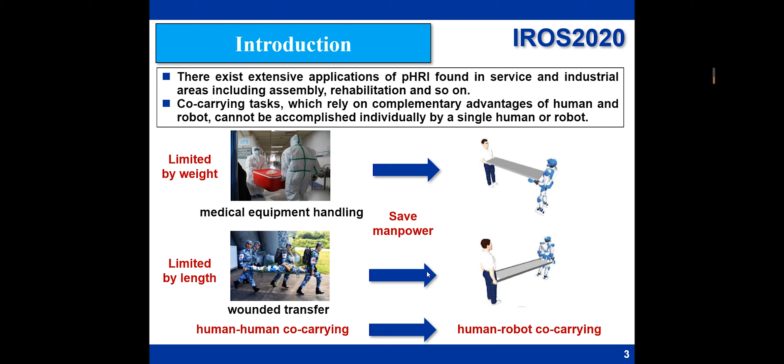Human-human co-carrying shows better task adaptability compared with robot-robot co-carrying when the environment changes suddenly or the task object changes. And robot co-carrying can save human effort compared with human co-carrying.

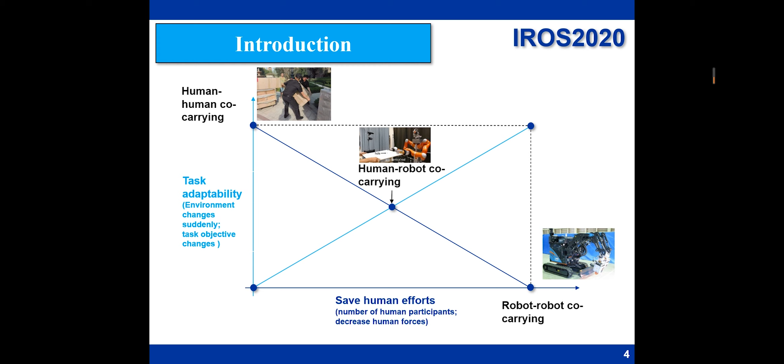Human-robot co-carrying combines the perception and decision-making ability of humans with the load and movement ability of robots. It can be used in unstructured environments and decrease the number of human participants and human forces required.

In human-robot interaction, to ensure the task is finished successfully, the robot should perceive a precise object location and know the prior task process. But more than that, the movement of the robot should be completely compliant to the motion of the human.

This means the robot needs to know the motion intention of the human and adapt to the movement and interaction force of the human. There are two collaborative modes.

One utilizes only force sensing. The human leads the task and the robot is blind to the task, following the human passively. This will generate delays or counteraction.

Another method utilizes force and visual sensing. The robot has visual ability and follows the human actively, so motion synchronization can be achieved.

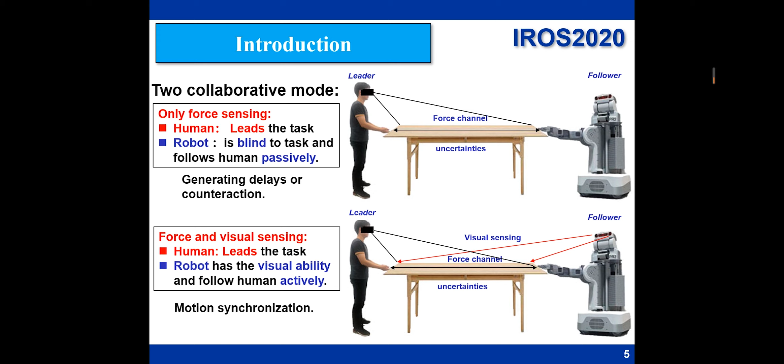In our work, the focus of interest is using vision and force sensing together to enable human and robot to collaboratively perform a co-carrying task.

The coupled relationship between robot, transported object, and human brings difficulties in analyzing the behaviors of both human and robot. The robot should have the following abilities.

The first is visual sensing, to measure human motion and estimate human motion intention to achieve motion synchronization. The second is force sensing, which can measure the external force on the robot gripper and regulate interaction force to achieve safe interaction.

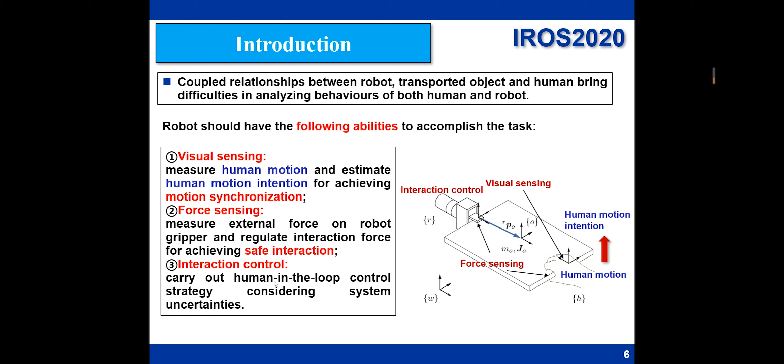The third is interaction control. It carries out a human-in-the-loop control strategy considering system uncertainties.

We also focus on key issues, such as how to solve robot's dynamic uncertainties and unknown disturbances, and second, the difficulty of mounting force sensors due to limits of practical application.

The third is how to estimate human motion intention to achieve cooperation. And the innovations are as follows: first, an observer is designed for estimating human control effort based on knowledge of the control input of the robot.

and object dynamics. Thus, no force sensor is required on the human side or the transported object. The second is that human motion intention is estimated by minimizing estimated human control effort, and visual sensing is employed in

obtaining human motion, which is used in the observer. A human-in-loop impedance control strategy considering robotic dynamics uncertainties is proposed, in which neural networks are utilized to compensate for

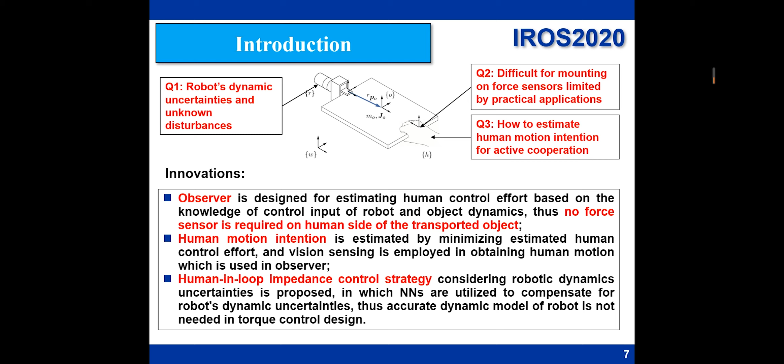the robot's dynamic uncertainties. Thus, an accurate dynamic model of the robot is not needed in the torque control design.

Research content contains four parts: system description, control design and sensing, observer design and stability analysis, and experiment evaluation.

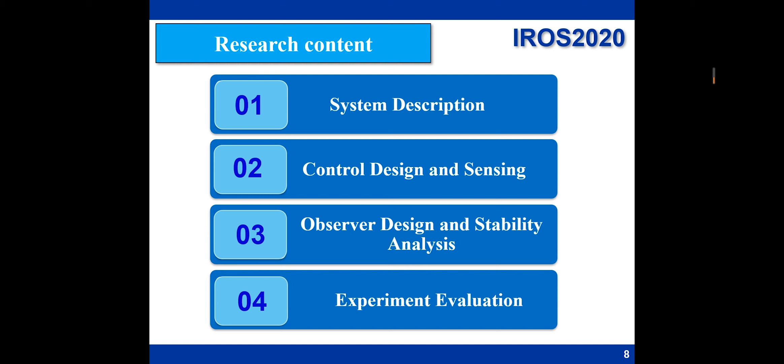First, we will introduce the system description. We can see M, C, G denotes the mass matrix, Coriolis centripetal matrix, and gravity vector of the robot and object.

In our work, we also propose a dynamic model of the object. We can see the states of the object change due to the external forces of human and robot.

It's a redundant control system. X0 denotes the position of the object's mass center. Xe denotes the human motion intention.

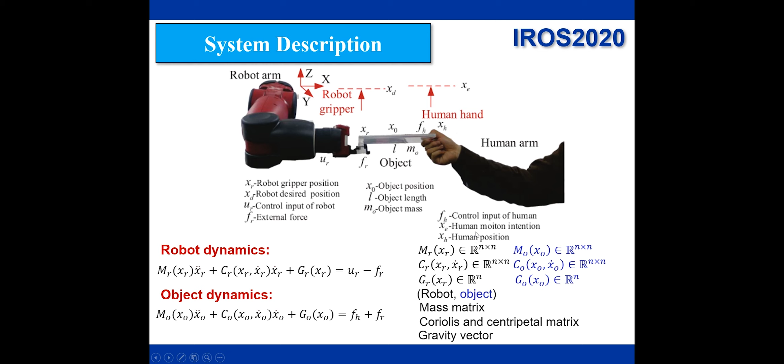Next, we analyze the control input of the human, where Kh denotes the stiffness matrix of the human and Xh denotes the human position. If the robot knows the human motion intention Xe in real time and moves towards the desired motion Xd according to Xe,

the co-carrying task can be performed successfully and actively. If Fh, Xh, and Kh are obtained, Xe can be calculated.

Before we design a tracking control algorithm for the robot, some issues should be addressed about how to acquire Fh, Kh, and Xh. In a scenario where it's infeasible to directly measure human force, how we can obtain Fh should be considered.

There are differences between Xh and Xr when human and robot collaborate to transport the object, so how we obtain Xh should also be addressed.

Without knowledge of human stiffness Kh, an effective estimation method to obtain Xe should be proposed.

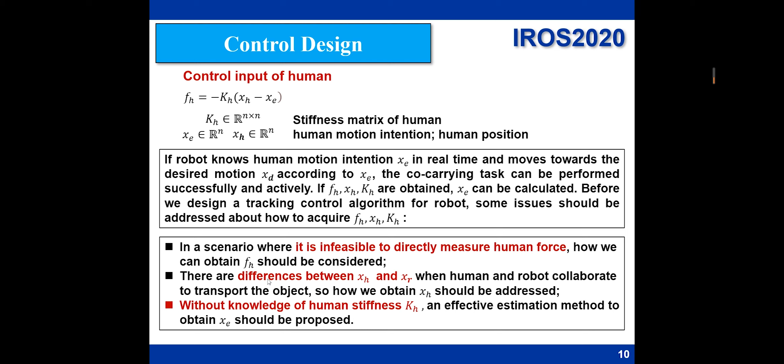Next, we introduce the control input of the robot. Different from the definition of control input of human, the control input of the robot is UR rather than the external force FR on the object. In view of the control objective, the control input of the robot is designed as follows.

We can see URB denotes the feedback input for tracking the desired trajectory XD, and URI denotes the input for compensating for the interaction force, and URF denotes the feed-forward input for compensating for robot dynamics.

We see URB is just like a PD controller where it contains a proportional gain matrix and differential gain matrix, which can be interpreted as the stiffness and damping matrix in impedance control.

And for URF, we can see that neural networks are employed to compensate for unknown robotic dynamics. The weight adaptation law is designed according to the backstepping method to estimate robotic dynamics.

We can see if we set XD as Xe, which means that the robot is aware of human motion intention, the robot can conduct synchronous and active collaboration with the human partner in the co-transporting task.

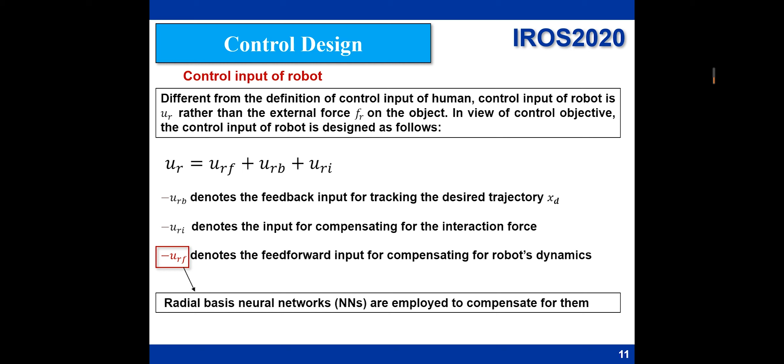In visual sensing, the calibration board is located on the board, and the position of the human hand is approximately the same as the position of the calibration board. We use a calibration board to obtain the board position, from which we can obtain the human hand position.

There exists another method: human hand position is obtained by Kinect V2. The BodyBasics-D2D of the Kinect depth camera is utilized in obtaining position information of the human hand.

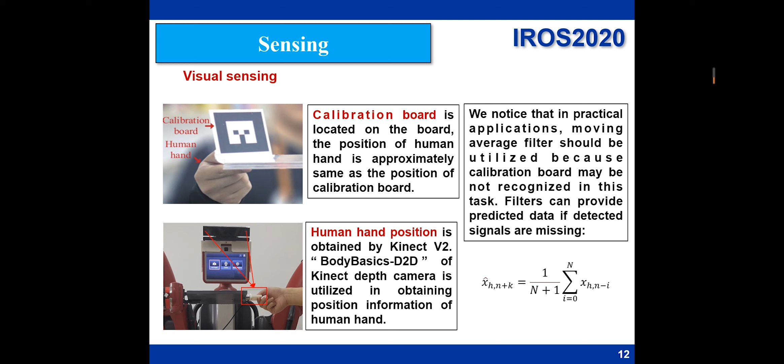We notice that in practical application, moving average filters should be utilized because the calibration board may not be recognized during the task. Filters can provide predicted data if detected signals are missing.

Xh obtained by the visual sensor should be transformed into the robot coordinate for further control design. Calibration systems are employed to obtain the relationship between the robot coordinate and the camera coordinate.

So the calibration board is fixed on the robot end effector. The transformation matrix RKT denotes the camera to robot reference coordinate, and the matrix RET denotes the robot end effector coordinate with respect to the robot reference coordinate.

Matrix ECT denotes the calibration board coordinate with respect to the robot end effector coordinate, and the matrix CKT denotes the camera coordinate with respect to the calibration board coordinate. The transformation matrix RKT can be obtained as follows, which can be rewritten as this.

Consider that ECT has no change when the robot is in different poses. Transform coordinate matrices in two different poses are given as follows, where 1 and 2 denote the two different poses. Then we write it as follows.

In particular, we use a well-known matrix to obtain RKT. By fixing the calibration board at the human hand position on the object, we can transform the human motion from the camera coordinate K to the robot reference coordinate R.

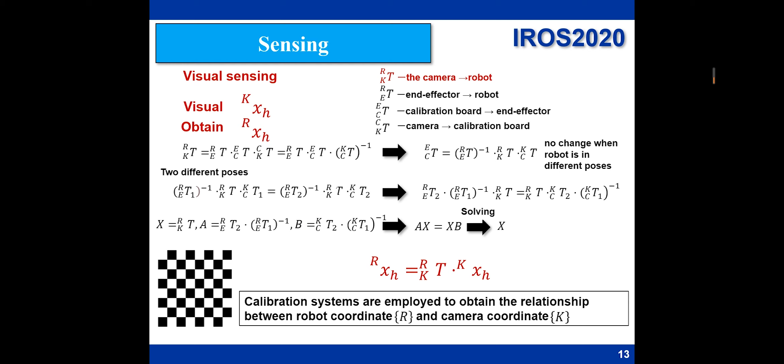About force sensing, we know the ATI Nano 17 calibrated force torque sensor is used to obtain 6 degrees of freedom forces and torques on the robot gripper. In another way, a Robotiq force torque sensor is used to obtain force and torque on the robot wrist.

Moving average filters are designed to obtain smooth force data. A limited bandwidth filter is utilized to deal with disturbance from the external environment and mechanical friction.

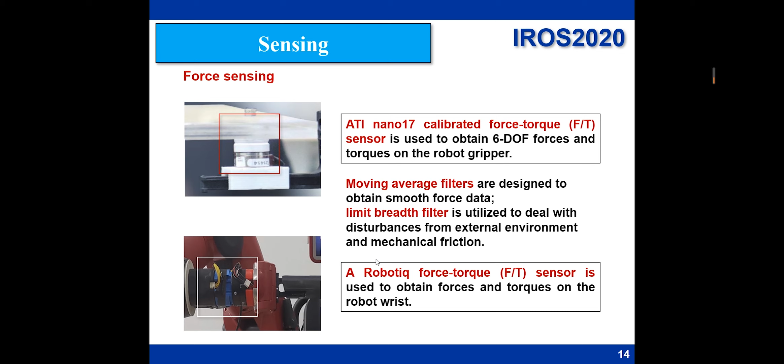You can see a force sensor is mounted on the robot gripper, and calibration systems are utilized to obtain the relationship between the robot reference coordinate R and force sensor coordinate F.

The transformation matrix RFT denotes the force sensor coordinate with respect to the robot reference coordinate. Matrix EFT denotes the force sensor coordinate with respect to the robot end effector coordinate, and matrix RET denotes the robot end effector coordinate with respect to the robot reference coordinate. So RFT can be transformed.

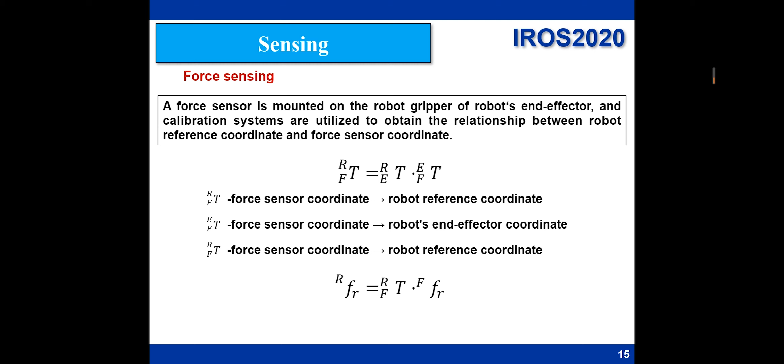Then we transform the control input of human from the force sensor coordinate F to the robot reference coordinate.

From the engineering point of view, it's infeasible to mount the force sensor on the human side of the transported object or on the human hand.

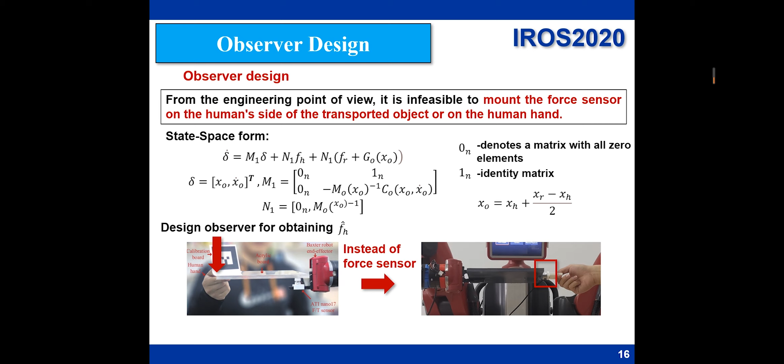Human motion intention Xe can be estimated based on the control input of human FH, and the control input of human has been estimated by our proposed observer, so Xe can be estimated.

We set the robot's desired trajectory XD based on the updating law, which means that the robot is estimating the human motion intention, and XD is generated towards Xe.

Although a human-robot co-carrying task is studied as a specific application, the proposed framework can be extended to other scenarios of physical human-robot interaction that rely on force and visual sensing.

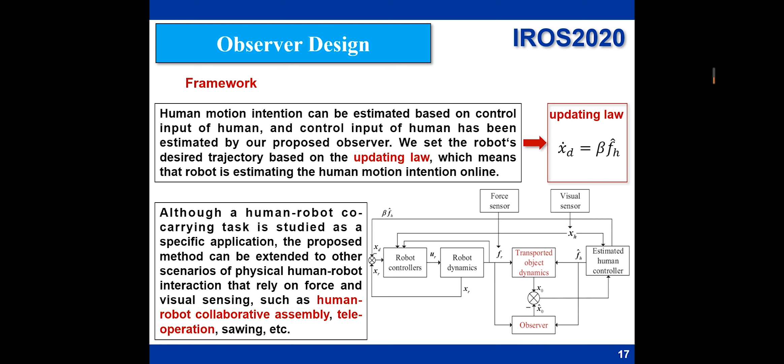Such as human-robot collaborative assembly, teleoperation, and sawing, and so on.

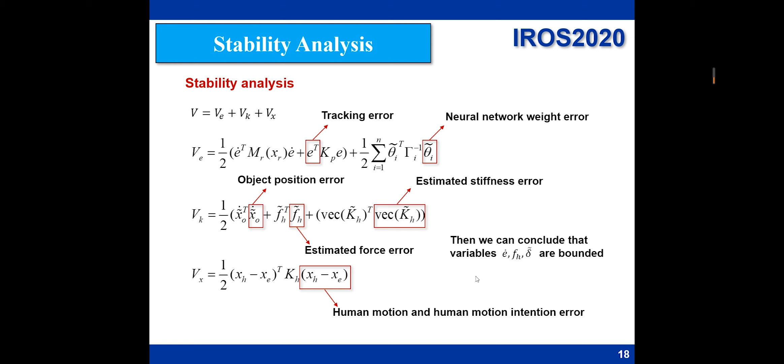We also analyze the system stability by defining the Lyapunov function candidates Ve, considering the tracking error and the neural network weight error, and VK considering object position error, estimated stiffness error, and estimated force error. Vx considers human motion and motion intention error. We can conclude that variables e, fh, and tilde delta are bounded.

We also do some simulations. We consider a scenario where human and robot perform co-transporting tasks in the XY plane. The object is chosen as a 0.1 meter long board, located parallel to the x-axis. In this task, rotation is not considered, only translational motion is involved.

The human hand grasps one end of the board, and the other end is held by the robot gripper. The task objective is to move the object from an initial position to a target position. We consider the initial position vector of the robot gripper and the initial human hand position vector. We consider the robot as a simple two-link manipulator.

We can see that under our proposed framework, the motion synchronization of human and robot can be achieved when the target positions are different. This also illustrates the effectiveness of our proposed observer.

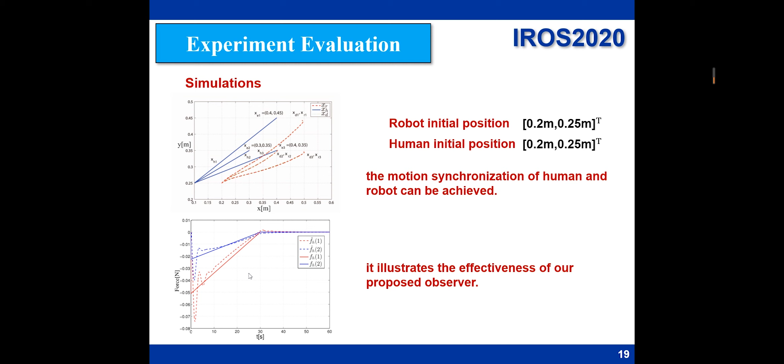Considering both accuracy and computational efficiency, two computers are utilized in the experiment. One computer calculates the feed-forward input using MATLAB Simulink and transmits the compensation values to the other computer via UDP communication. The other computer receives sensory information from the Baxter robot, visual sensor, and force sensor, calculates the feedback control input, and generates the control input to control the robot using ROS RSDK.

Note that the Jacobian matrix transpose can be obtained from the Python kinematics and dynamics library, and the control torque vector of the 7 joints can be calculated.

A Kinect 2 3D depth camera is utilized as a visual sensor for obtaining human motion XH. The Kinect 2 contains a color camera, a depth sensor, and 4 microphone arrays, providing capabilities in 3-dimensional motion capture and voice recognition. It's mounted on the head of the Baxter.

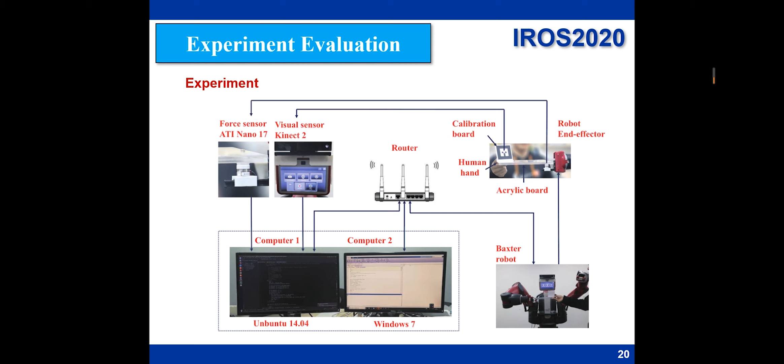A calibrated force torque sensor, ATI Nano 17, is used to obtain the force and torques on the robot gripper. The experiment has been performed with 4 subjects with ages ranging from 20 to 32. The group is formed of 3 males and 1 female, all right-handed, from our university, with robotic research experience but blind to the experiment settings.

Human subjects and robot co-transport the object from the same initial position to the target position. Due to human motion uncertainties in real applications, we only ensure similar XH across the 4 subjects. This figure demonstrates that the task can be accomplished by different human subjects, though sensor noises and rotation around the x-axis result in non-smooth curves of xh and xr, which may influence experiment results and cannot be avoided.

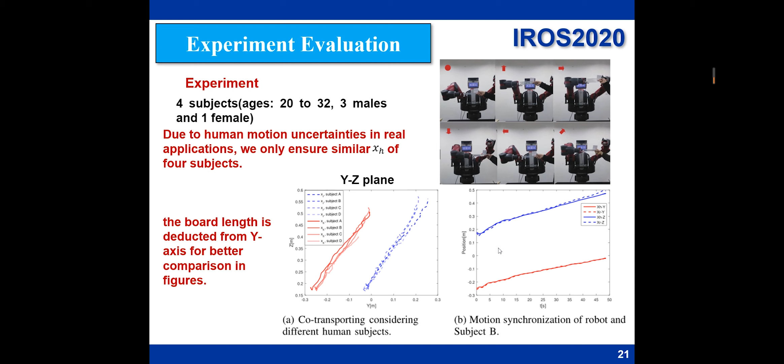This figure shows that motion synchronization of the robot for subject B can be achieved on the y-axis and z-axis. Also, mean square error is employed to evaluate the robustness of our proposed method.

We also compared our proposed method with visual servoing control and passive impedance control. Visual servoing (VS) is utilized only with a visual sensor to achieve motion tracking, and PI relies on sensory information from only force torque sensors to achieve complete interactive behavior.

The VS control method is redesigned to make the robot track XD towards human motion XH directly, rather than human motion intention, with a PD-based controller employed for tracking. The co-transporting task cannot be performed successfully using only the VS method because there exist rigid connections between the human, board, and robot. Therefore, we consider the tracking performance under VS without co-carrying the board for comparison.

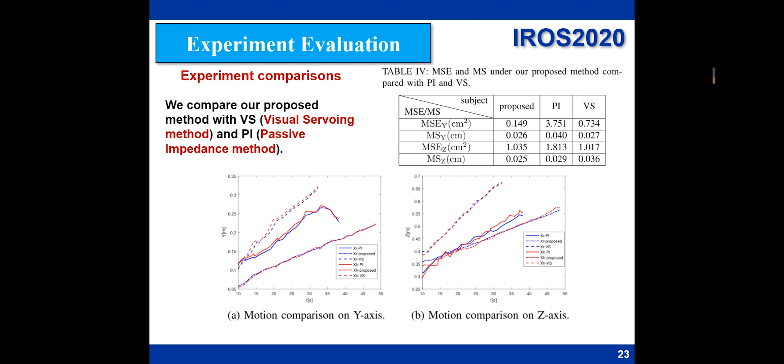From the table, we find that our proposed method shows better collaborative performance compared with VS and PI in the task.

We also apply our proposed framework in the human-robot collaborative carrying task on a ball and board system. The robot under our proposed method can not only effectively cooperate with human to move the board to the target position, but also actively avoid the ball falling from the board during the carrying task.

A radial basis function neural network control is designed to ensure the robot complies with human motion, considering uncertain robotic dynamics. Visual servo control based on visual recognition and location is used to generate reference height and angle to adjust the position and posture of the board to keep the ball staying on the board.

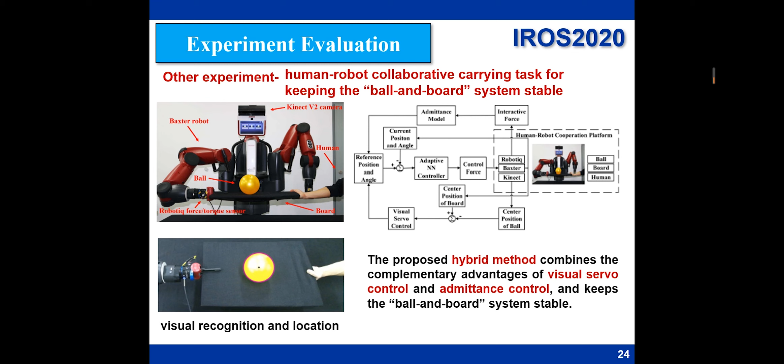The proposed hybrid framework combines the complementary advantages of visual servo control and admittance control and keeps the ball and board system stable. To prove the manipulator can prevent the ball from falling off with disturbance actively in the task, in the first case, we cover the operator's eyes.

Hence the operator cannot know the position of the ball and cannot actively adjust the board to prevent the ball from falling off. The two tasks prove our proposed control method has the ability to prevent the ball from falling off with disturbance actively during the human-robot collaborative carrying task.

In the second case, the operator and the robot hold the ends of the board separately, and the operator moves the board to a target position. Meanwhile, the manipulator should comply with the operator and help the operator carry the board to the target position.

There is a yellow ball on the board, and the robot should prevent the ball on the board from falling off during the carrying task by adjusting the board. The Kinect 2 camera can identify the ball and locate its center position in real time.

Seen from the figure, the carrying process of human-robot collaborative carrying can be achieved. To prove the universality of our proposed method, we invited 10 different operators to do the repeated task and recorded the error between the center of the board and the ball.

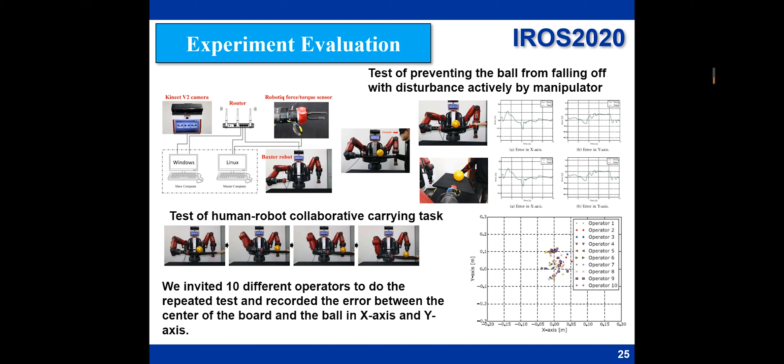We also apply our proposed framework to other tasks, and an adaptive impedance control for physical human-robot interaction is put forward in the task space. Further, we design a complete human-robot interaction framework with visual and force sensing.

By utilizing a switch function, the constraint problem with unknown initial tracking conditions can be solved to improve tracking performance. The adaptive impedance control algorithm realizes a safe interaction between human and robot and can achieve good control effect in different motion states.

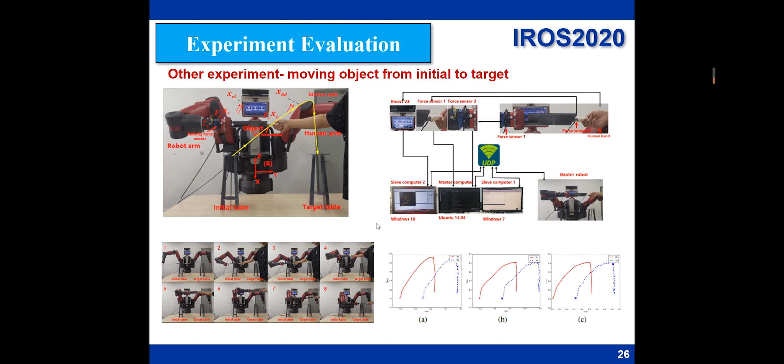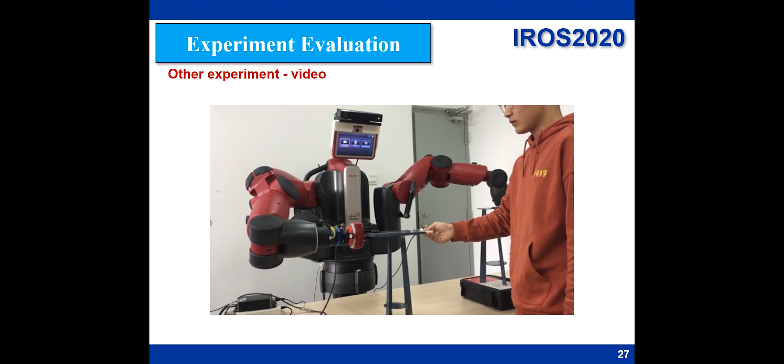And we can see from the video: first, we put the object on the first table, and then the human holds the handle at the end of the object, and the robot uses a Kinect to obtain the position of the human hand. The robot controls its right arm to the other end of the object according to the position of the human hand and the length of the object, and clamps the object. Then the human and the robot move the object to another table together.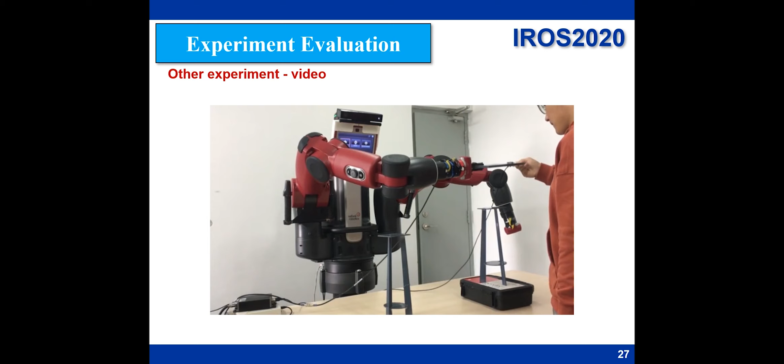We also do some work in human motion intention estimation. Delays are commonly encountered in a leader-follower cooperative mode. Human-robot co-transporting is a typical leader-follower task where human plays a leader role while the robot is a follower. We propose a hybrid visual-force framework considering such delays in human-robot co-transporting.

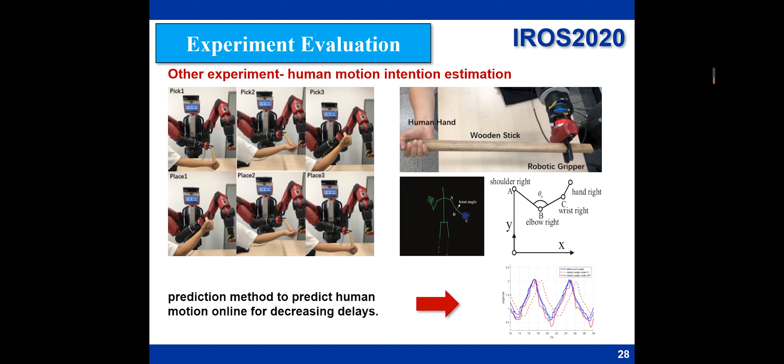A human hand motion prediction method is proposed to make the robot know human hand motion in advance. Motion synchronization can be achieved if the robot tracks and predicts human hand motion using a filter. Compared experimental results show that our proposed framework is effective in such co-transporting tasks, and motion synchronization can be achieved. Human subjects feel comfortable and find it easy to accomplish such tasks.

In future work, co-transporting tasks such as human-robot collaborative assembly, teleoperation, sawing, and so on will be further designed to evaluate our proposed framework, and a more robust machine learning method will be investigated.

This method will localize the human hand using a visual sensor without a calibration board. Force sensors will be mounted on the human side of the stick for evaluating human interactive experience using objective measures. Human user studies with questionnaires and subjective measures will also be designed.